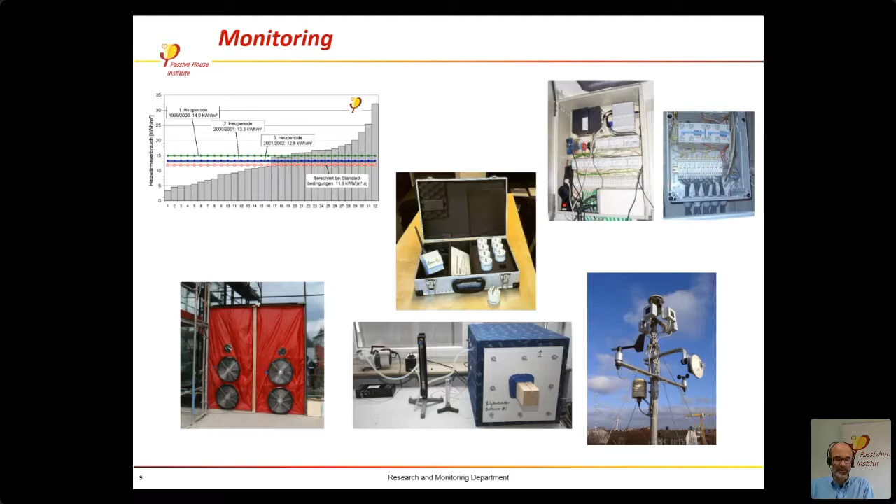This box here contains plugs that have small electricity counters in them so that we can measure the electricity consumption of different household appliances. And weather stations also form part of what we are measuring if we are looking at the performance of a certain building.

Usually it's not only about doing monitoring, but what is important is to understand what's going on. So we need monitoring results on the one hand, but we need an understanding of what happens on the other hand. So one example is this school which you see here, which was built in Frankfurt. The photo is actually a model that was used for an architectural competition.

The building is placed on a slight slope, so designers did not want to place insulation below the floor slab because at that time they were afraid that the building would start to slide. We didn't want to put it on top of the floor slab either in order to avoid all the thermal bridges.

So the final decision was to have insulation a little on the floor slab and also at the sides of the building, so that we would get a warm piece of ground below the building where heat losses are reduced. And in order to make sure that this approach is actually working, we were burying some temperature sensors under the slab in different points.

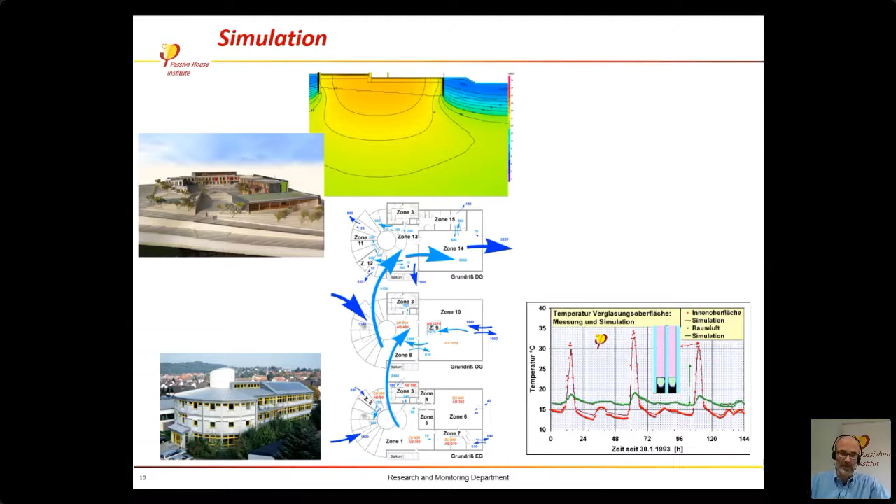The calculation in this case was carried out by the DYNBIL program, which is a dynamic building simulation program, similar to, for example, EnergyPlus or TRNSYS or IDA ICE, which has been developed and is still being maintained at the Passive House Institute. Originally by Wolfgang Feist back in the 1980s.

These types of programs are important because they are close to physical first principles. So we can be relatively sure that if we look at some kind of new strategy, a different climate, a different way of storing heat, say phase change materials, for example, if we investigate these by using dynamic building simulation with DYNBIL hour by hour, we can predict how the building is behaving without having to build it and to run experiments.

But of course, we need to be sure that the programs are actually representing reality correctly. There could always be coding mistakes in them or physical effects that were overlooked in developing the model.

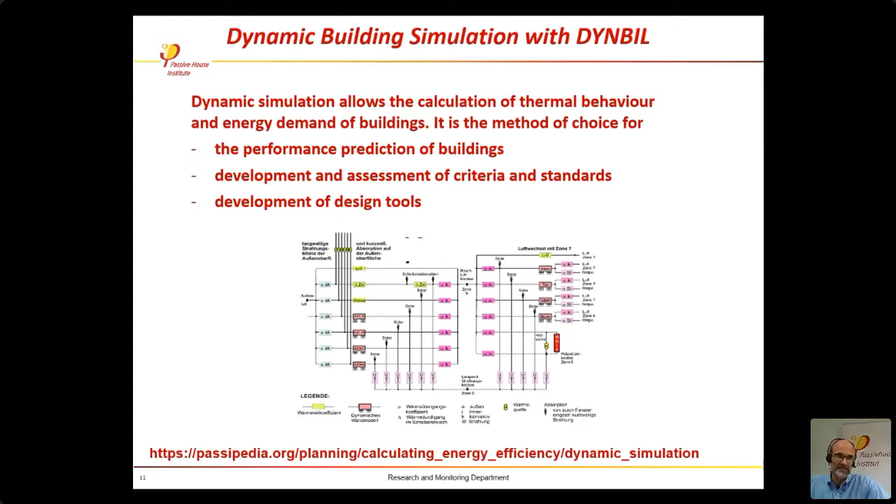Let me show you a few results from this first passive house in Darmstadt-Kranichstein, which was first inhabited in 1991, where this DYNBIL validation has been carried out. So what we see here is an exterior wall with some masonry, limestone in this case, and an exterior insulation. Here, sensors were installed that would measure the temperature on the interior surface and at the boundary between the insulation and the masonry, and somewhere in the middle of the insulation and on the exterior surface.

And on the left-hand side, you can see how these temperatures are developing over a few days in mid-October. So the exterior surface becomes warm if the sun is shining onto it, much warmer than the ambient air. And during the night, it gets colder because of radiation, infrared radiation into the cold sky. At the center of the insulation, we have slightly higher temperatures, and at the inside, the temperature is nearly constant at about 24 degrees in this case.

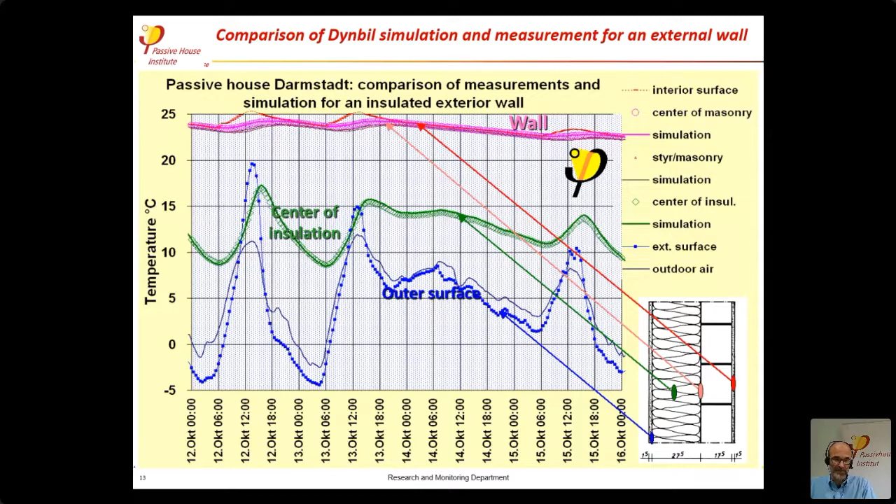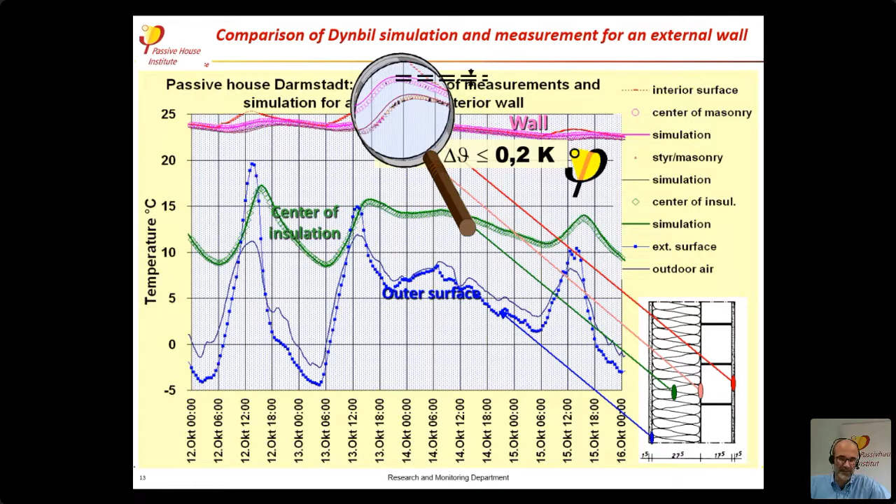So the points in this diagram are monitored values, measurements, and the lines are calculated. And so we hardly can distinguish the two. There's a difference of no more than 0.2 Kelvin, about 0.3 Fahrenheit, between calculation and monitoring, which gives us a lot of confidence into the performance of these models.

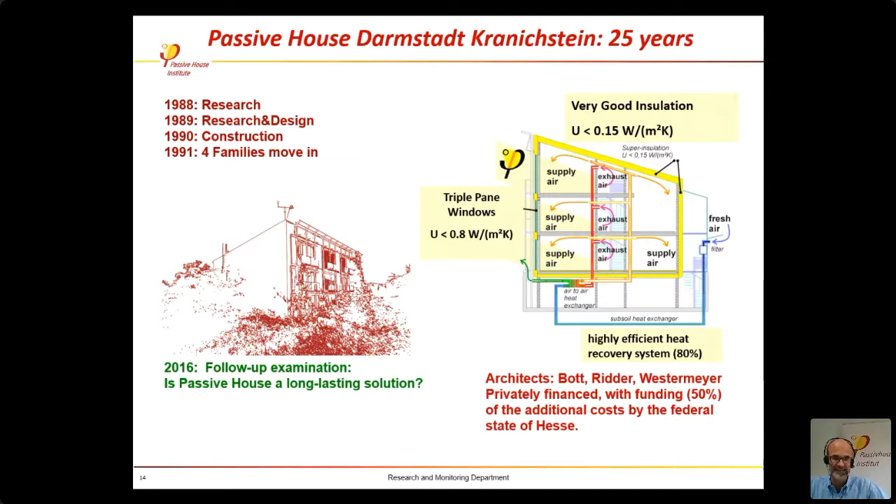As I said, the building was first inhabited in 1991, and 25 years later we had the chance to do some research project that would ask the question, are the passive house strategies that have been followed here a long-lasting solution? Does the building still perform as it did in the beginning? You might say, well, sure it does, because we know the gas consumptions for space heating, so directly measured how much gas is going into the building in order to provide heating.

And this was, well, in the first year it was a bit higher. On the left-hand side, that's an ordinary building or a low-energy building. In the first year, not all the insulation was properly installed. The building was not fully finished. But afterwards, for more than 20 years, the heating energy consumption is extremely low, and there is no tendency seen here that it would increase.

An average of 8.4 kilowatt hours per square meter per year was measured here. The PHPP would predict 10.5 kilowatt hours per square meter and year. So it is slightly conservative as you would desire it from a design tool. So from the gas consumptions, we can say that apparently the building is working after 25 years as it did in the second year without any deterioration.

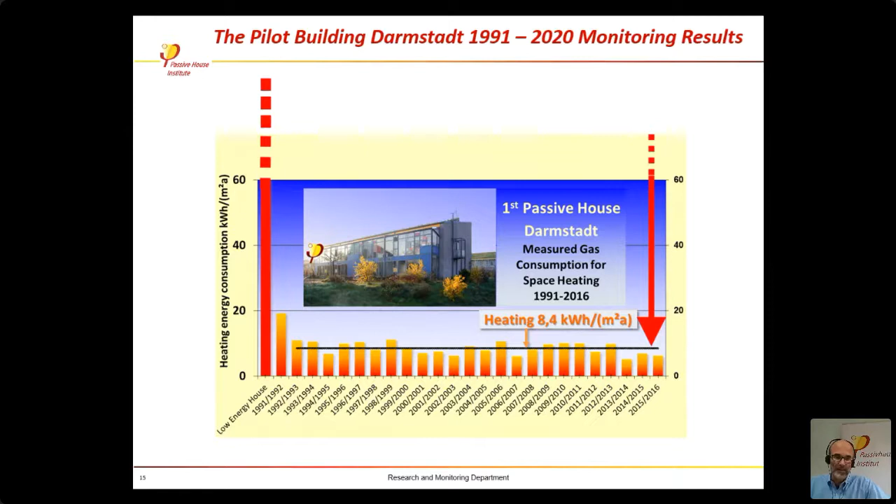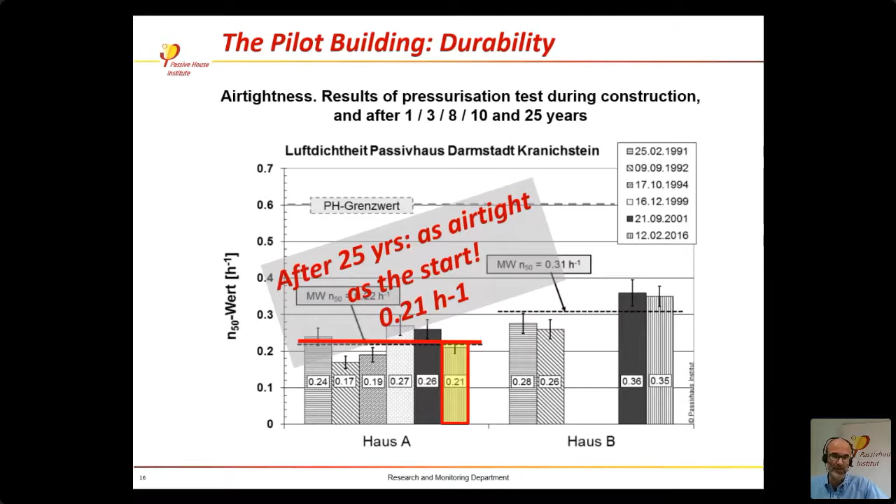So that's an important result from research, from monitoring, that the strategies that were followed in this building for making it airtight are durable, are long-lasting, are still working after 25 years as they did on the first day.

Another result from that project shows the roof. This roof construction might appear a bit critical because it has a watertight and obviously also vapor-tight layer here on top. So any humidity that by diffusion is entering the roof construction could go up and would be stopped here at the vapor barrier and at the watertight layer.

And usually it would dry out during summertime because the roof is heated by the sun that's shining onto the roof. But now we also have a grass roof, which is evaporating water so that it is cooler. And the question is, is this construction durable? Does it really last? So temperature and humidity sensors were installed in 5 different places.

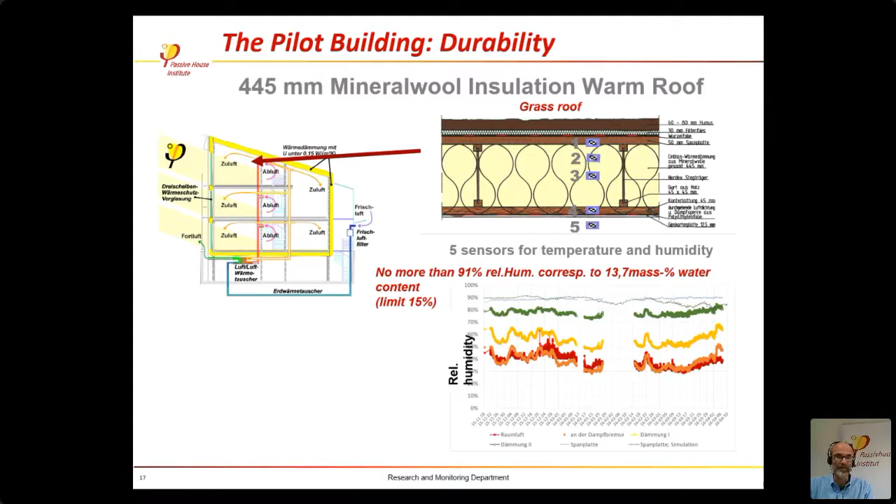The results tell us that the maximum humidity that was achieved in this construction was 91%. Now, 91% sounds maybe a bit close to 100%, but in fact it means that we have a water content in the wood construction of less than 14% mass, and up to 15% there is absolutely no problem, so we can conclude this construction is simple, but it's durable. It lasted for 25 years without accumulating humidity, and we may assume that there will be at least another 25 years of useful life for this construction with a U value of 0.1.

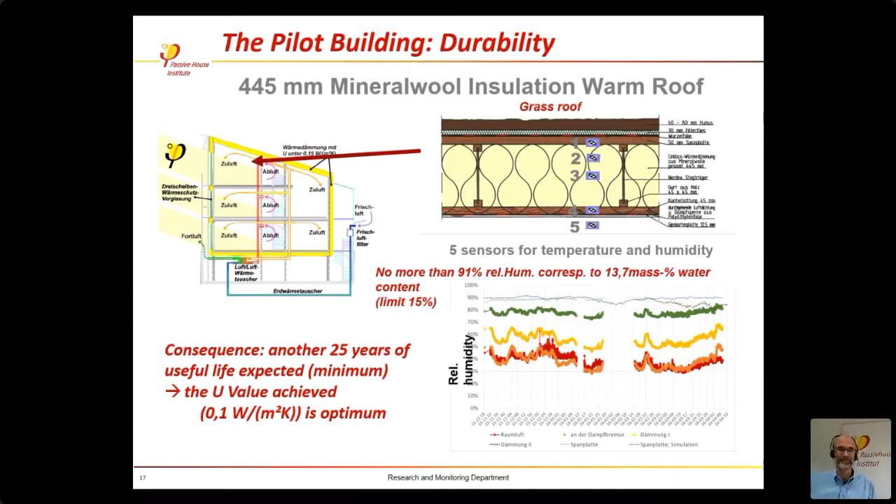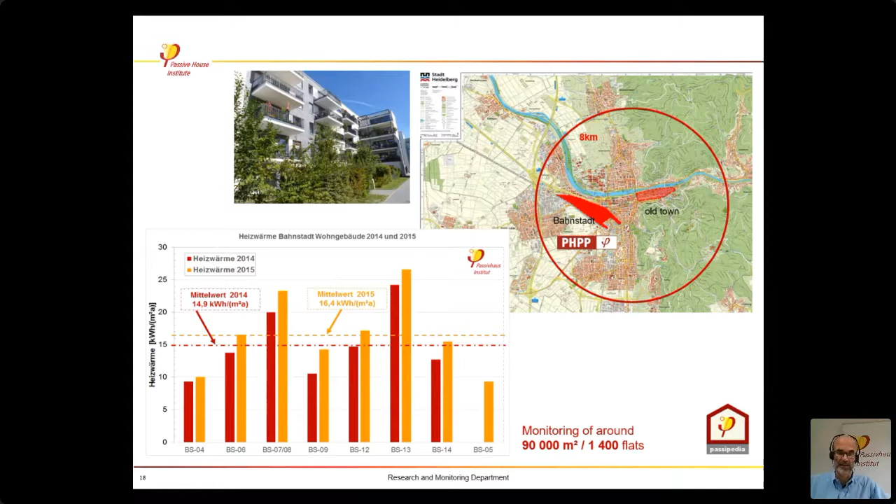And in addition, we can say that on average, we are close to the passive house limit. We have approximately 15 kilowatt hours per square meter and year heating demand measured in this large development, so we can say we don't need scientists to be involved in developing passive houses and passive house details. Every designer can do it and can successfully realize these buildings. Another important result from doing this research.

In the last years, we are pushing frontiers to different building typologies. So a design project for a hospital has recently been finished, and we are now going to do monitoring there. Hospitals, supermarkets, swimming pools are different from residential buildings in that the main energy consumption is not heating alone, but there are other energy consumers that are relevant. For example, in a supermarket, we would have refrigerated display cabinets, which consume more than 50% of the total energy that is used in a supermarket.

And it turns out that the waste heat from these display cabinets is enough to heat the supermarket even on the coldest days. So we don't need an additional heat generator, for example, a gas boiler or something, if we have an appropriately designed building envelope. And still, it is important to aim at maximum efficiency of these refrigerated cabinets and of the cold generation, much more even than looking at airtightness and insulation of the building envelope, because this electricity consumption is much more important for the total energy consumption.

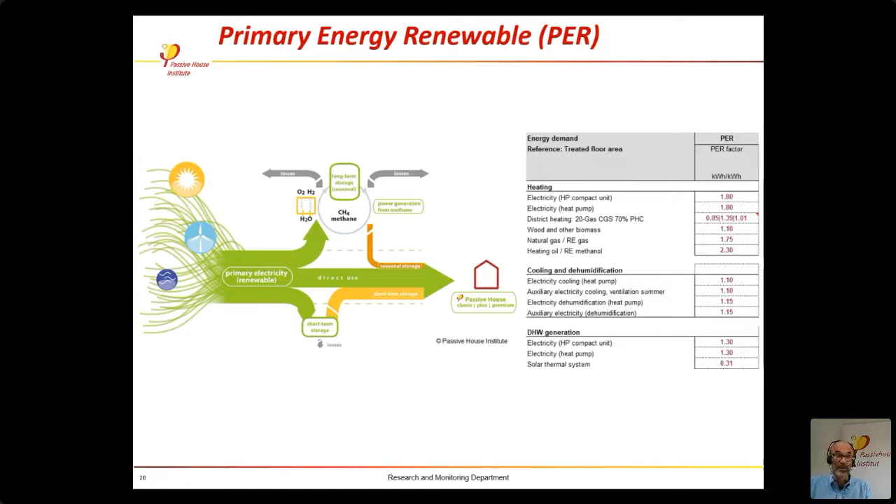This is reflected in these primary energy renewable factors, PER factors, that for the example of Germany are about 1.8 for electricity for heating, but 1.1 for electricity for cooling. And for domestic hot water and household electricity that are required all year round, it's somewhere in between. So an important research result that allows us to judge different building strategies, different concepts of how a building could be designed with respect to the future energy system.

A question that arose some years ago was how vented drain pipes affect the energy balance of a building. Now, this is a good example, and that's why I'm showing it here, for how this whole process is evolving. First of all, we try to understand what the governing principles are, what is happening here with the air that is passing through the drain pipes.

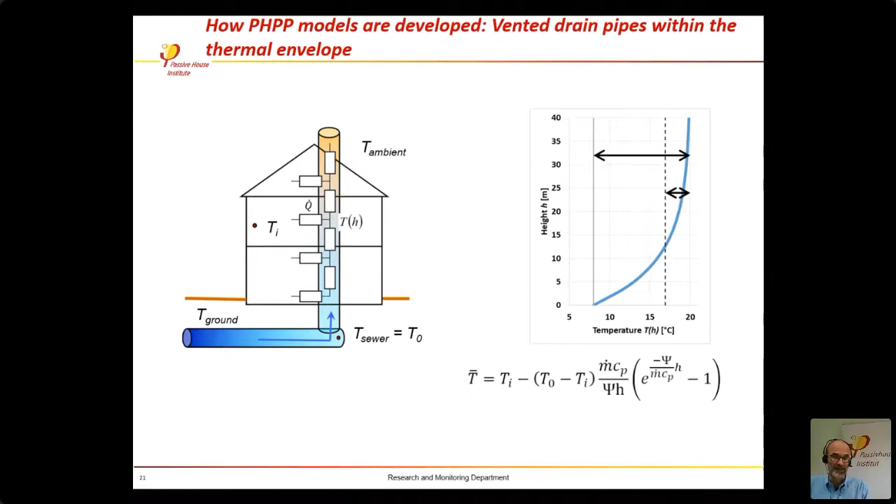It gives us this curve. So here's the height of the building, up to 40 meters in this example, and here's the temperature. We enter with about 8 degrees, and then the temperature is rising as the air rises up in the building. But this rise obviously comes to a saturation the closer we get to room temperature. So if we have a very high building, it will probably not make much of a difference whether this drain stack is insulated or not, whether we try to reduce the airflow in there, because the air that is passing through the stack will be warm at the end of the day anyway.

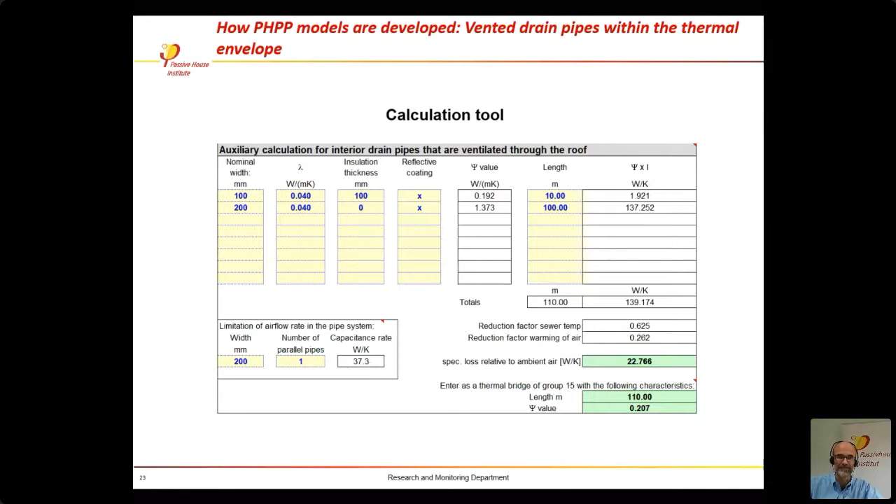So this type of research, as you may expect, is expensive. It takes weeks of work, months of work to get a monitoring system up and running. It needs to be kept running sometimes for several years. You need to evaluate all the results, add calibration factors, repair broken sensors, develop different models and check if they agree with the measured data.

So we can only do that with support by some public entity, for example, by the European Union, by governments of the federal states. The state of Hesse, for example, has been highly supportive of the passive house development. They were very important for us.

Just a few examples, funded projects by the European Union. The most important one and the first one is CEPHEUS, cost-efficient passive houses as European standards.

Several hundred dwelling units were built in different European locations and were monitored, and the monitoring results for the first time proved that passive houses can be built not only as scientifically accompanied demonstration projects, but on a larger scale by ordinary designers, by ordinary craftsmen, really having the chance to become a standard.

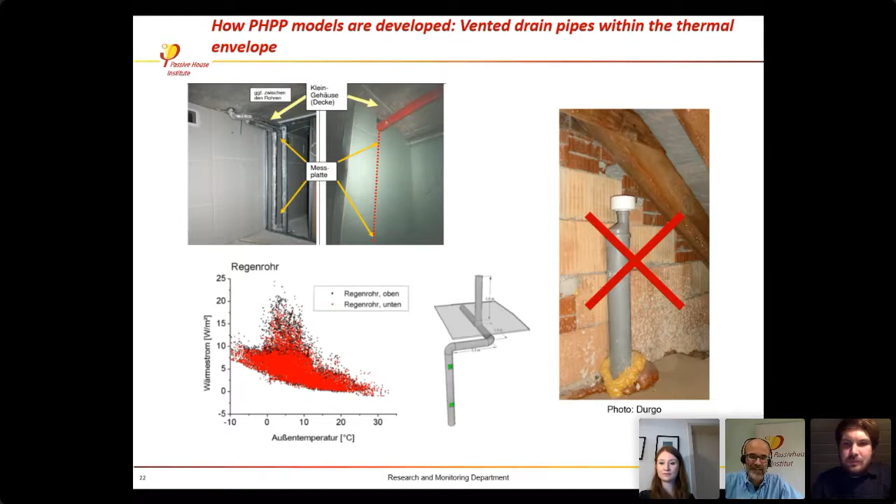Yes, that is what you would ideally do. So it is crossed out because in this case we don't have any adverse effects from the drain pipes on the energy balance because there is no air passing through the pipe. So the pipe is closed on top, and only if water is running down the pipe and is taking air with it and is creating an underpressure, then the valve, the white thing on top here, is opening and is allowing for air to get into the pipe, but then it closes again.

So this is not what we are talking about here and which causes the problems and which needs to be considered in the energy balance, but it's those drain pipes that are opened on top and that are passing through the roof. Okay. Perfect.

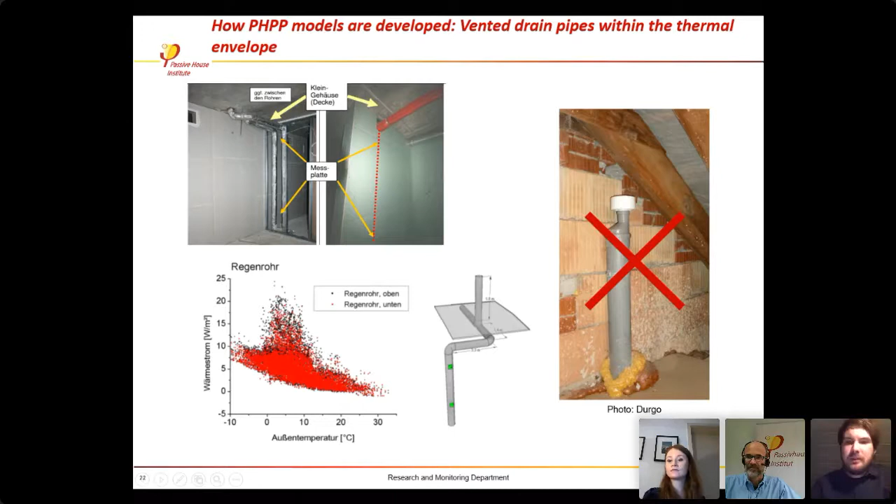We have a question from Daniel. Have you looked into the cooling capacity via the ventilation system? He clarifies, as far as he understands, if we do not humidify afterwards, the maximum load is 3 to 5 watts per square meter. To be honest, I don't quite understand the question. So okay, so yeah, I know.

If we are trying to cool a building only by the ventilation system, so assume you have a residential building with a typical air change rate of 0.3, 0.4 per hour, and you are cooling the incoming air. How much cooling capacity could you bring into the building? And the answer, in fact, is it is on the order of 3 to 5 watts per square meter. It can be a bit higher. You could get up to 6 or 7 watts per square meter, which is not very much.

So a typical split unit would be designed to cover about 60 watts per square meter, so that it is able to quickly bring the room to a comfortable temperature once it is overheating and you get into that room. But in many cases, you can cool a building simply by cooling the supply air. And we did put quite some research into that, trying to find out are there comfort problems if you have small amounts of air but with a low temperature entering the room. And as it seems, this is not the case.